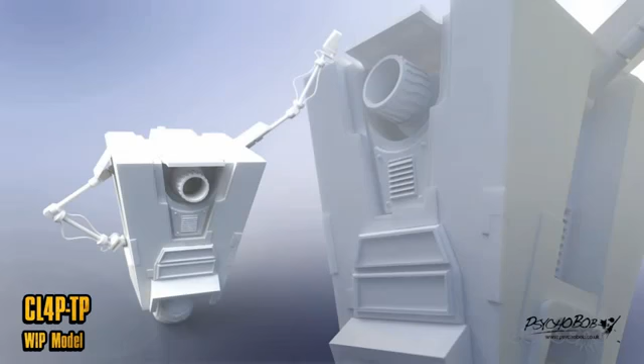Hello, my name is Nimish Patel, also known as Psycho Bob, and I've been commissioned by GameSpot UK to create a 3D printing of that crazy robot that we all love from Borderlands, Claptrap. In the video you're about to watch, I'll be showing you how I went about creating the initial 3D model on the computer ready for 3D printing.

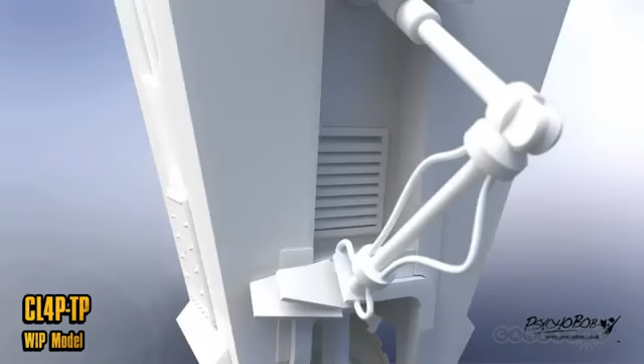Well, the first step of the process is to gather up all the reference material I can find on the internet. This generally involves searching for a few hours, gathering up screenshots from the game, any fan art maybe that I could find, and also I look on YouTube for any videos that may be of help. I also have a dual monitor set up, and one of those monitors supports multiple inputs, so I have my Xbox plugged into that monitor so I can always boot up the game for any first-hand reference in a picture-in-picture window.

I decided to use CAD software for this particular project, as not only is Claptrap's design quite well suited for this, it also creates some very clean meshes for 3D printing. Anyway, without further ado, let's get on with the video.

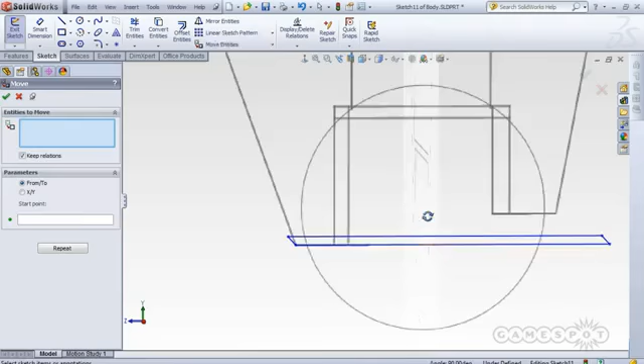Before actually starting the model, I made some very rough reference images in Photoshop and used them as backdrops to help guide me. You can actually see those in the footage, and they were based off the reference images I found on the internet. I also made a plan on how to break down the model into separate parts. This is just so when I have the physical model printed out and in front of me, this will make it a lot easier to apply the various paint effects or wiring any of the electronic components.

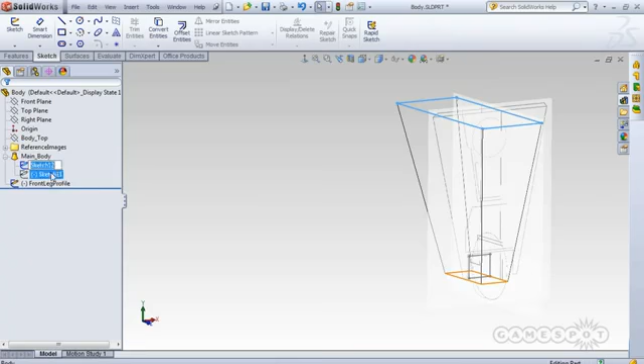I started off with the main body, as it's not only the largest and most defining part of the model, but what I'll also be using as a base foundation for all the other connecting parts. So I began by making the general wedge shape of the body and moved on to cutting out the areas at the base of the model where the wheel would fit in. Claptrap being symmetrical meant that I only had to model half the body and mirror things over afterwards when ready, so you may notice in the footage that sometimes I'm ignoring one side of the model.

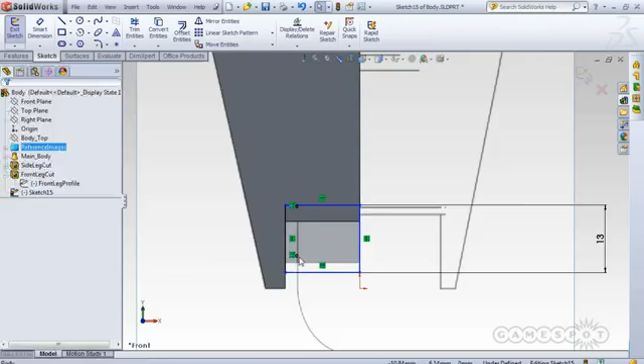As mentioned earlier, I have a dual monitor set up, so on the second monitor that you can't see, I generally have reference images open, but I also on this screen have the Shapeways website open. This is the 3D printing bureau that I'll be using to print the model, and the reason I have this open is so I always have access to their material specification sheets. This information is important when designing for 3D printing, as you don't want to make any of the parts of the model too small for printing or too thin.

There's nothing worse than spending hours and hours on a model only to find that some of the details won't come out in the final print, or the model itself won't print because you broke some of the specification guidelines. And these specifications unfortunately change depending on what material you're printing, so you have to make sure you're looking at the correct ones. For instance, the material I'll be printing this in is called White, Strong and Flexible. It has a much more formal and less memorable name, but this is what Shapeways calls it. For this material, 0.7mm is the minimum wall thickness, and 0.2mm is the minimum detail size.

So throughout the modelling process, I'll be referring to the specification guidelines to make sure I'm not doing anything that will cause any print issues, and of course I'll be referring to the reference material on the second monitor. Sometimes that's the images I've downloaded from the internet, sometimes it's video footage, and sometimes it's just me playing on the game.

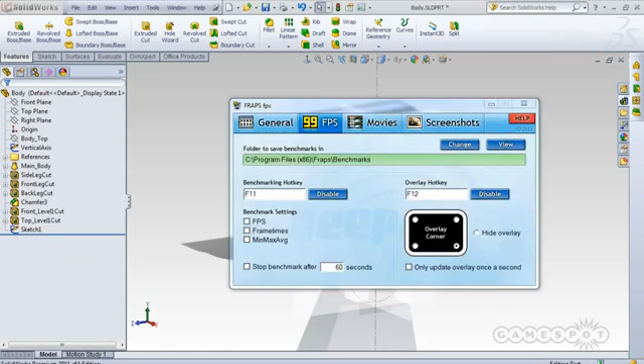As the model continues to develop, I routinely check my downloaded reference images and also the game, making any adjustments to the model as necessary. As I don't have any exact blueprints for Claptrap, everything is done by eye, and I realised after starting the model that my Photoshop backdrop images were a little bit off, so I adjusted the model accordingly so it's a bit closer to the correct shape.

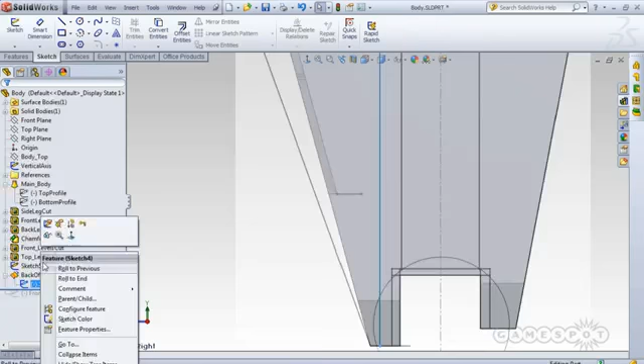Making these adjustments by eye is something that is done throughout the entire modelling process, as I don't have any exact dimensions for the character. Now that the main body was roughly shaped out, I could begin creating some of the other parts and start making this look a little bit more like Claptrap.

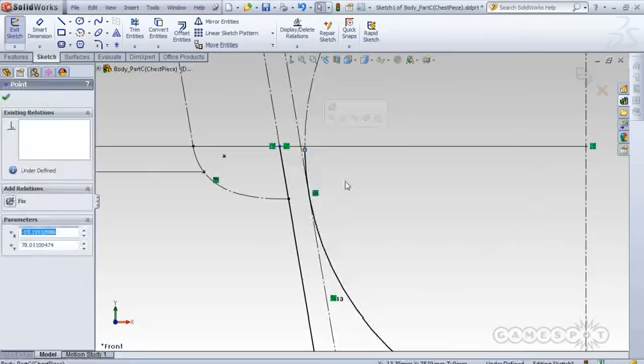Whilst creating any of these parts, I always had to keep in mind those printing specs. Sometimes this meant changing details on Claptrap, or unfortunately, removing some of those details altogether just so it could be printed. As mentioned earlier, before starting the model, I planned out how to split up the model exactly. Some things were obvious to split out as separate parts, such as a wheel so I could get the wiring in easier, but others were split into separate parts just to make the painting process easier, as I had planned to apply various painting techniques to the model.

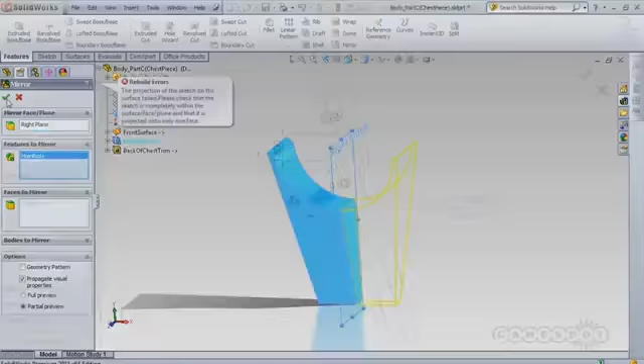The plan was to split this model into roughly 25 pieces to tailor all of my painting and wiring needs. Claptrap could have easily been printed in 7 or 8 pieces, but as mentioned I had other plans so it was split into many more pieces. Until this point in the modelling process, all the parts had been solid objects. Not only would printing them as they currently are prove to be more expensive than necessary, it also left me with no way to fit the electronic components into the model.

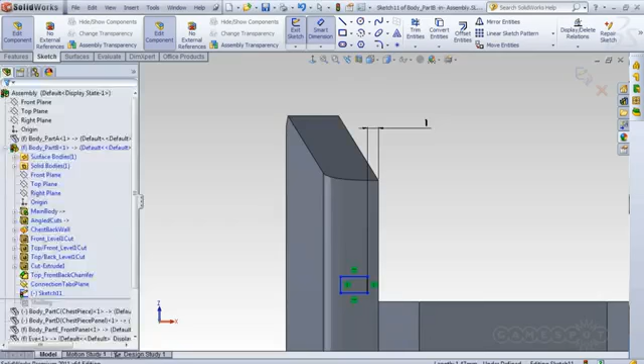So I began hollowing out the parts whilst keeping the minimum wall thickness in mind, the structural strength, and also how I wanted the electronic components to fit into the model. I also made tabs and slots on the pieces so it'd be easy to line up and assemble once printed. This also helps increase the joint strength between parts.

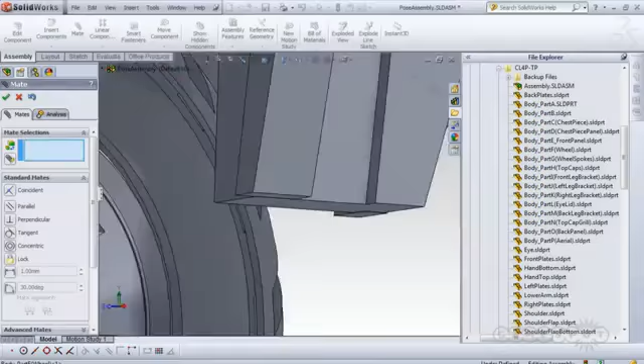I had finally finished the modelling stage. Now all that was left to do before preparing the final package to Shapeways was to pose the model and make sure everything looked okay. Some of the parts would be thin, and rather than having weak posable joints, I felt it was much better to weld the joint into the pose so it's more structurally sound. And here it is, the finished pose model.

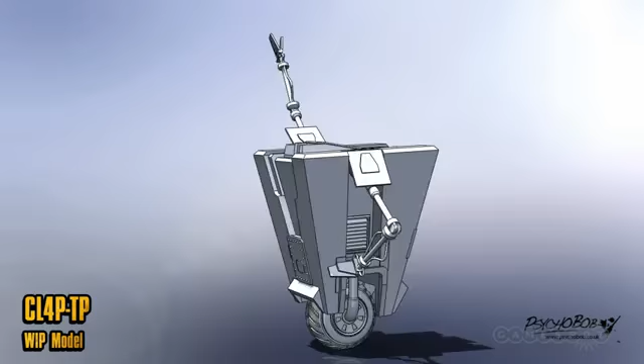Welcome to Fyrestone. I am CL4PTP. You may call me by my locally designated name, Claptrap. For continuing, please accept this Echo communication device and heads-up display, provided free of charge by the Dahl Corporation.

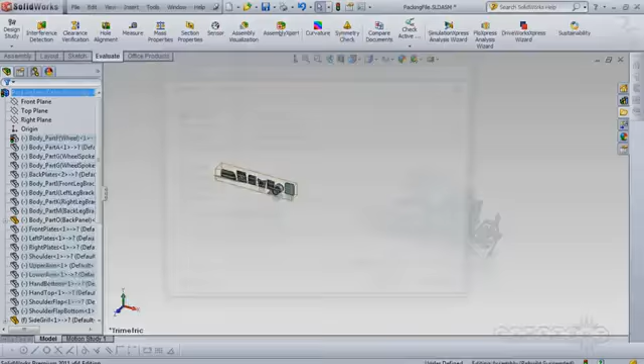Now it's time to pack the model data into a file for upload to Shapeways. When I create models, they're generally either in a more traditional modelling software like Luxology Modo, or occasionally in CAD software like you've been watching so far. No matter which software I create the model in, you're generally working with a proprietary formatted file, so it needs to be converted to one that Shapeways can accept. Generally I export to an STL formatted file. The CAD software allows me to directly export to this format.

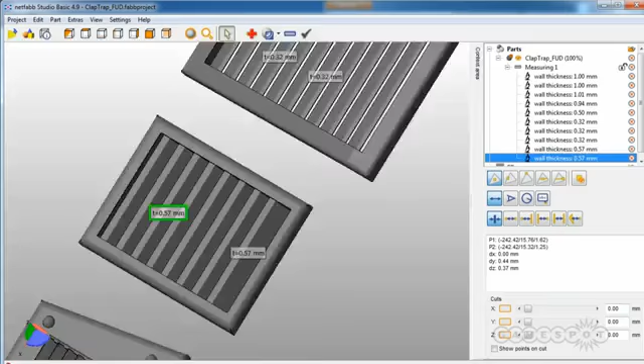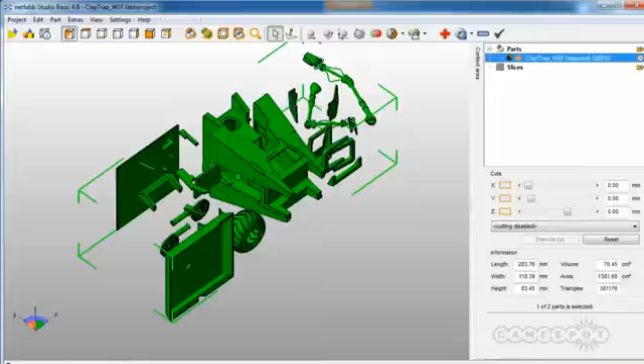Once it's been exported, I then use a free program called netfabb to check the data and make sure there's no issues. netfabb is a great free program. Some tools and functions are locked out to you unless you upgrade to the professional version, but for the purpose I'll be using this for, it's not going to be an issue as I have access to all the tools I need. netfabb will let me double check the wall thickness at various points in the model, the polygon count, and also whether the model is manifold. Shapeways has a polygon limit in the model, so this needs to be checked before uploading to them.

Now that the STL file has been created and checked in netfabb, it's time to upload the file to Shapeways. When you upload the file to the website, it will go through an automatic check system which will check for the most common issues in the model. Generally, the automated check is completed in about 15 or 20 minutes. Once it is completed, you'll receive an email notification and your upload becomes visible in the My Models section of your account. From here, the model is ready for ordering, and once you order, the model will go through some additional human checks, but if all goes well, the model will then be printed and shipped to you.

Well, this wraps up the video for the modelling process.